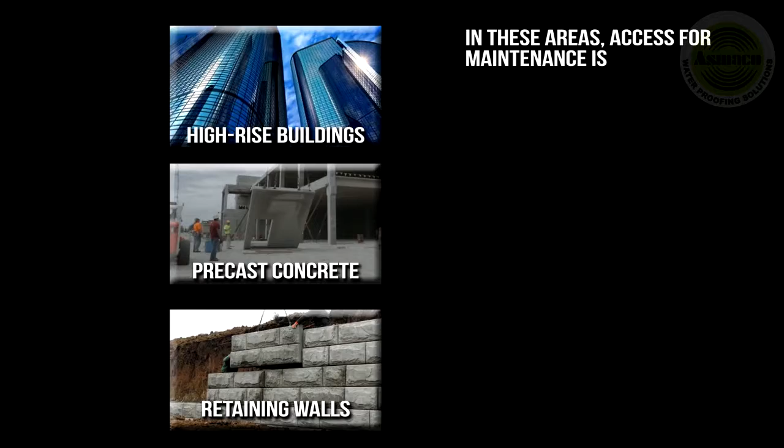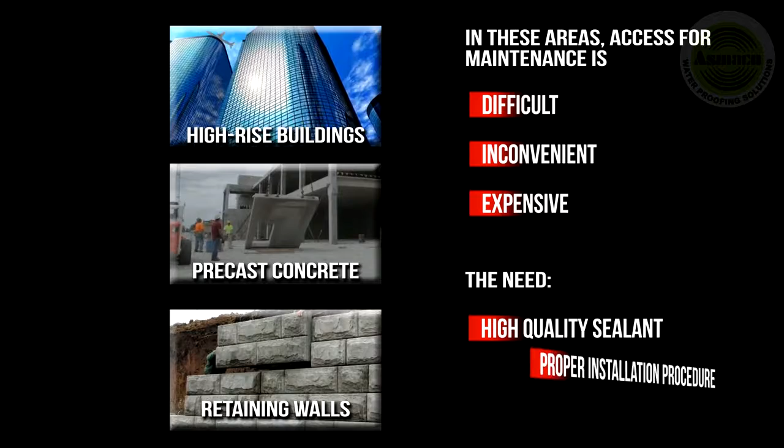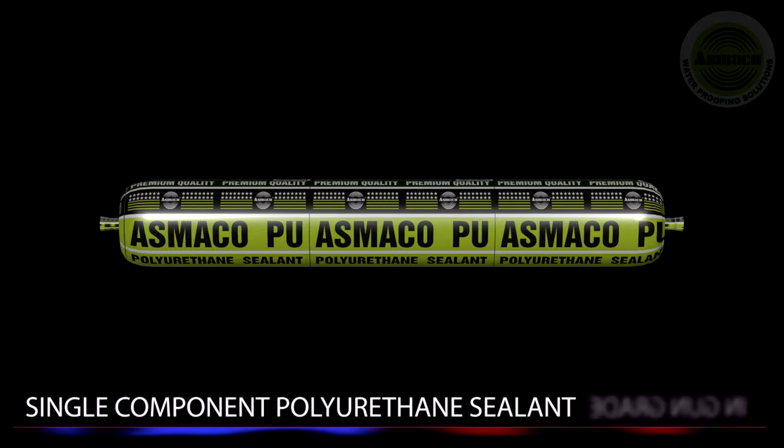In high-rise buildings, precast concrete construction, retaining walls, etc., access for subsequent maintenance is difficult, inconvenient, and expensive. This demands a high-quality weather-resistant sealant and proper installation procedure so that chances of failure are minimal. ASMACO PU90 single-component polyurethane sealant is the most effective answer to all these needs. It is available in gun-grade consistency.

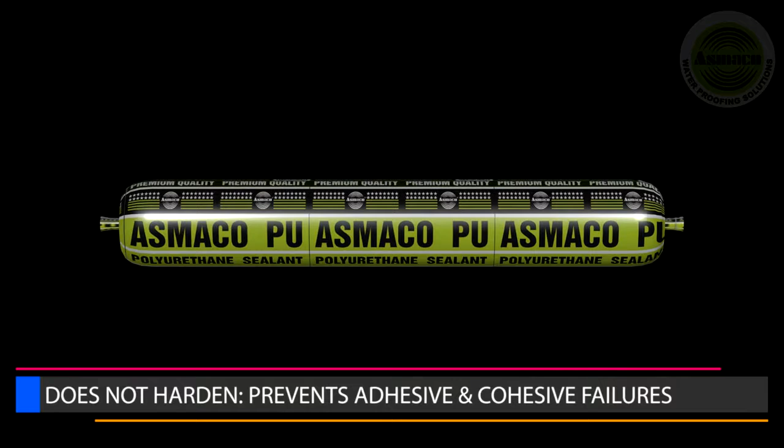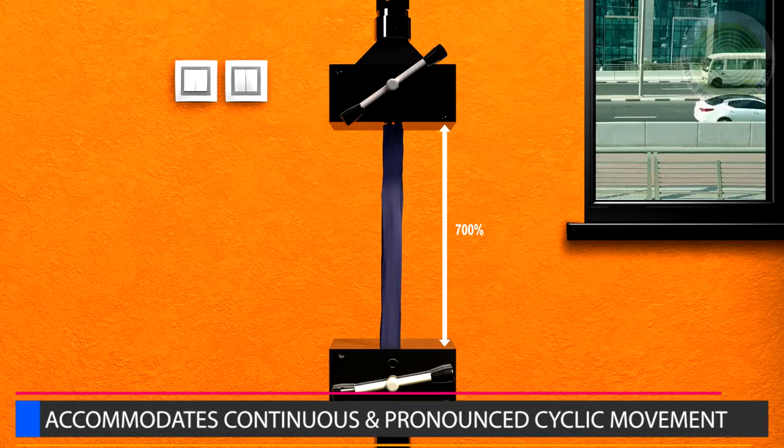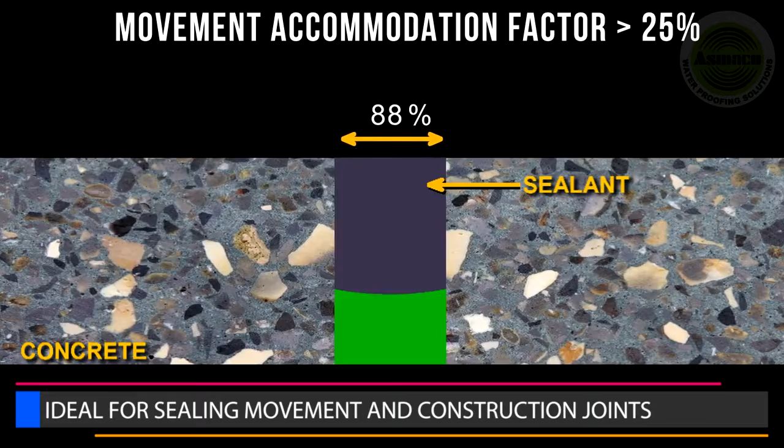Let us see some of its benefits. It does not harden with aging. This prevents adhesive and cohesive failures with time. ASMACO PU90 has an elongation of 700% and accommodates continuous and pronounced cyclic movement. With a movement accommodation factor of over 25%, it is ideal for sealing of movement and construction joints, as well as joints between different construction materials.

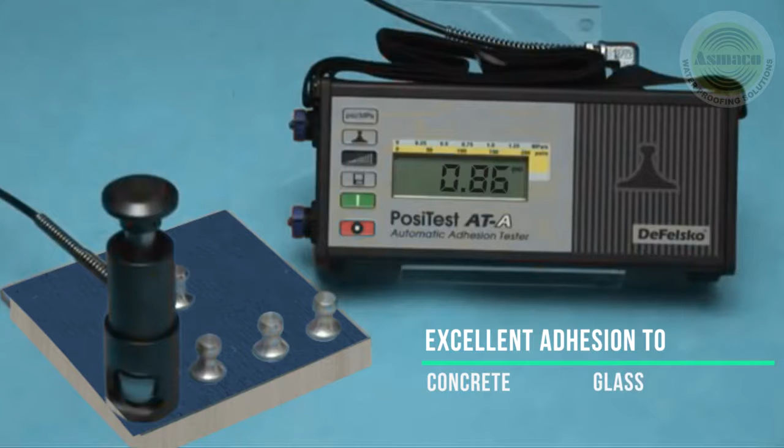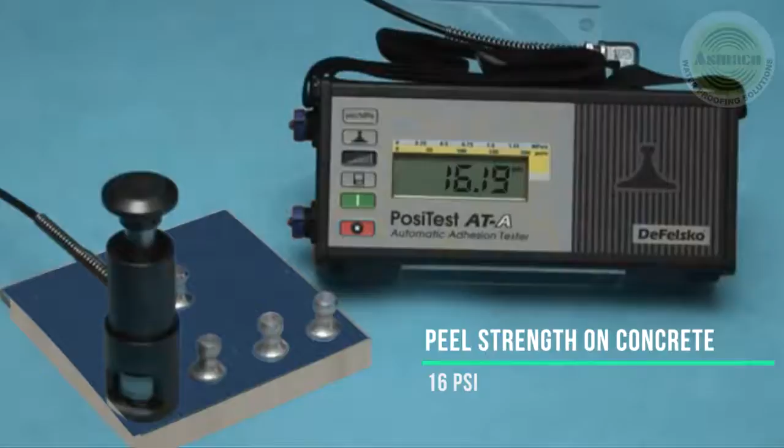It has excellent adhesion to most construction materials, including concrete, glass, aluminium, and stainless steel, with a peel strength on concrete of 16 psi. This makes it ideal for use in curtain wall panels, tilt-up panels, window glazing, and flashings, etc. ASMACO PU90 remains unaffected by UV rays, ozone, and prolonged weathering, making it ideal for outdoor use.

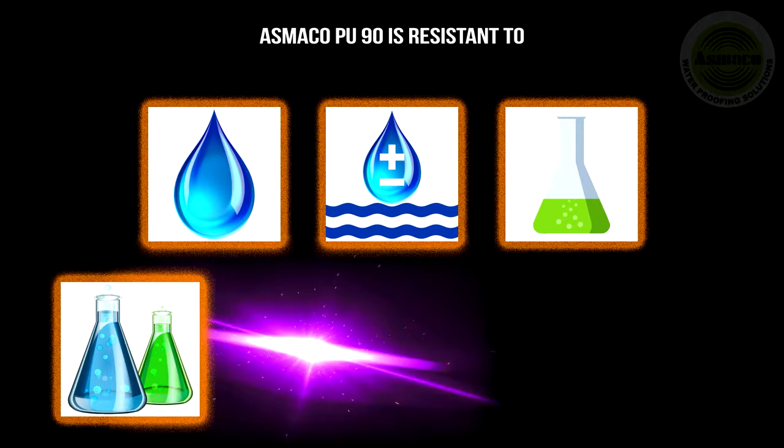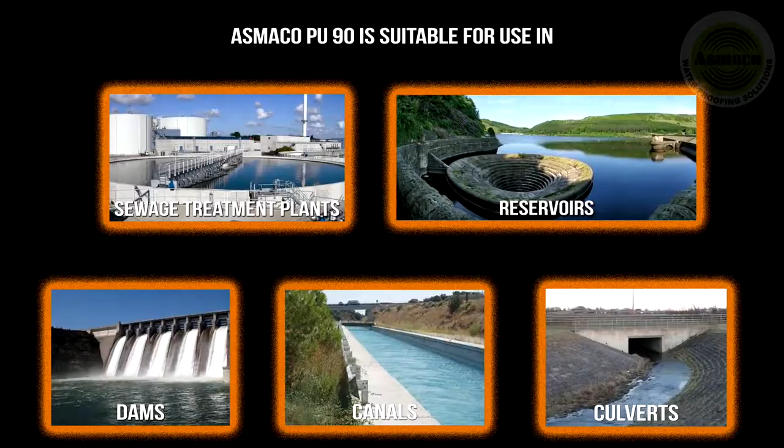It is resistant to water, salt water, most alkalis, mild acids and common chemicals, vegetable oils, lubricating oils, and fuels. Therefore, it is suitable for use in water-retaining structures such as sewage treatment plants, reservoirs, dams, canals, and culverts. ASMACO PU90 is certified safe for potable water use, making it ideal for potable water tanks.

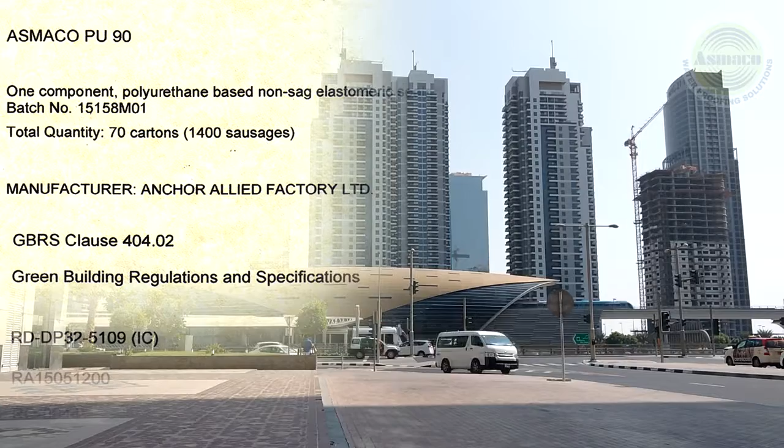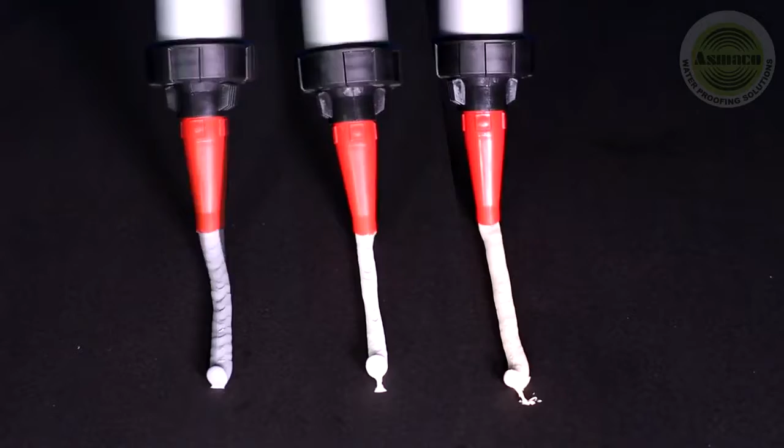It is also certified by Dubai's Central Laboratory as meeting Green Building Regulations and Specifications Clause 404.02. With a wide service temperature range of -40 degrees to +79 degrees Celsius, ASMACO PU90 is ideal for almost all climatic conditions. It is available in grey, white and beige colors. And for any other color of your choice, just specify your color from the RAL shade card.

Therefore, ASMACO PU90 is absolutely the ideal choice where tough technical requirements and aesthetics are both important, such as sealing prefabricated GRC or precast concrete panels, etc., because the sealant completely blends in with the color of the structure. It is also ideal for caulking joints around windows, doors, and skirtings, as well as wall and floor joints. With all these properties, ASMACO PU90 is far superior to all the conventional joint sealing materials like bitumen, mastics, metallic channels, and expansion sheets. ASMACO PU90 is very easy to use.

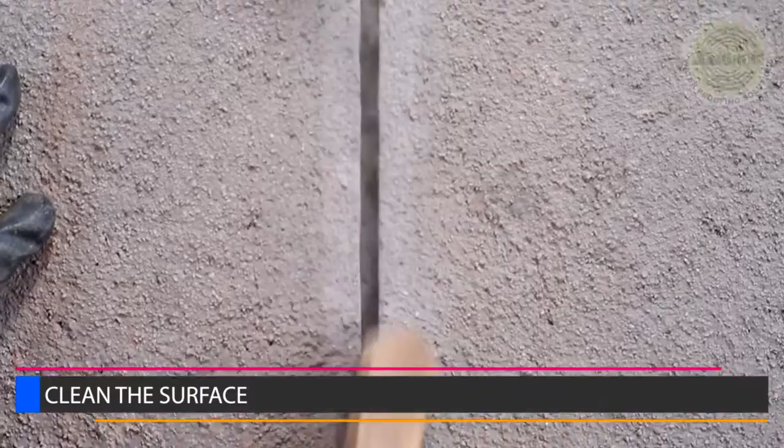Here is a quick look at the tools needed for this job. Also ensure that you wear protective clothing and use safety gear like helmet, eye protection, breathing mask, gloves, and safety shoes during application. Proper surface preparation is of utmost importance. Ensure that the joint surfaces are sound and fully cured. Clean the joint surfaces to remove all dust, laitance, and other contaminants by rigorous wire brushing or grinding if required. Remove the dust.

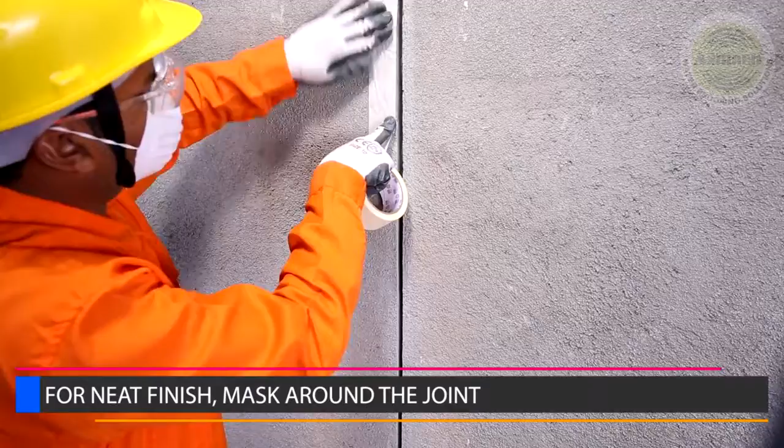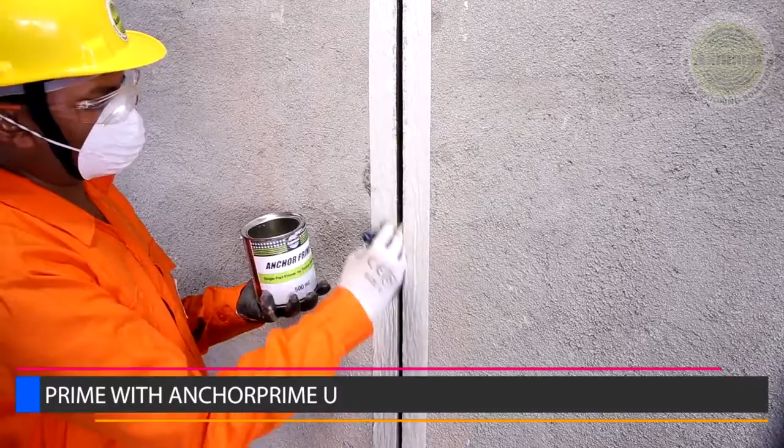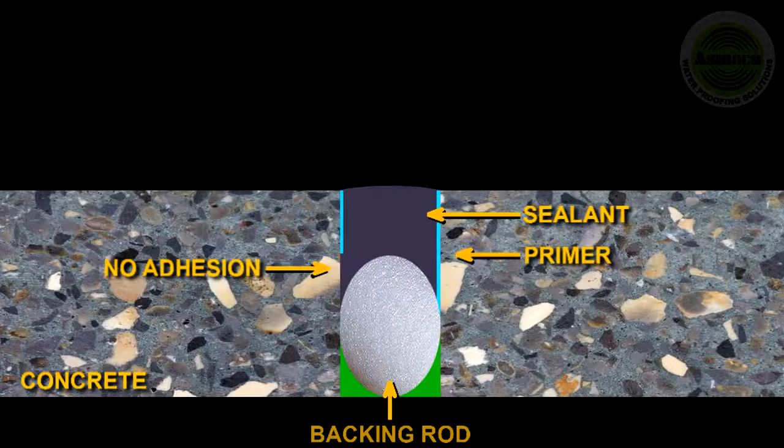If a neat finish is required, mask the surface around the joint using a 2-inch wide masking tape. This will prevent the primer and sealant from spoiling the appearance of the surface. Priming is the next step. Using Anchor Prime U, apply one coat with a clean dry brush. Ensure complete coverage. Proper priming is critical. If the primer is not applied to the sides throughout the depth of the joint, then the sealant may lose adhesion during joint movement and the seal may fail.

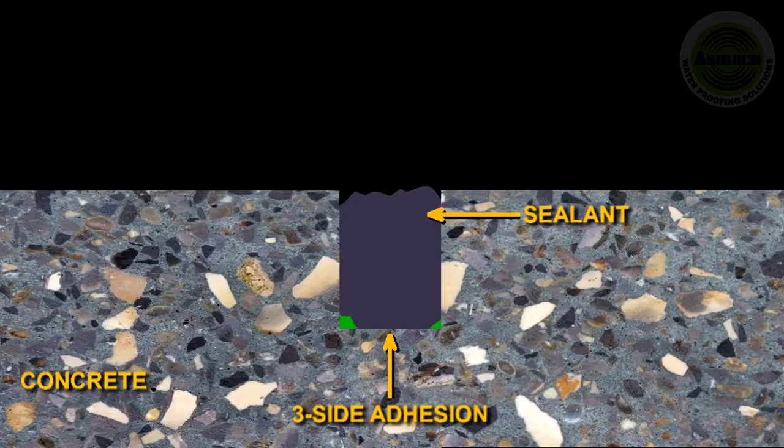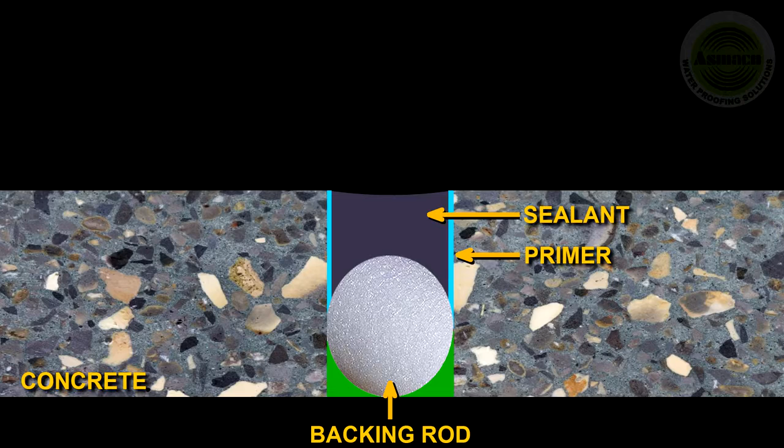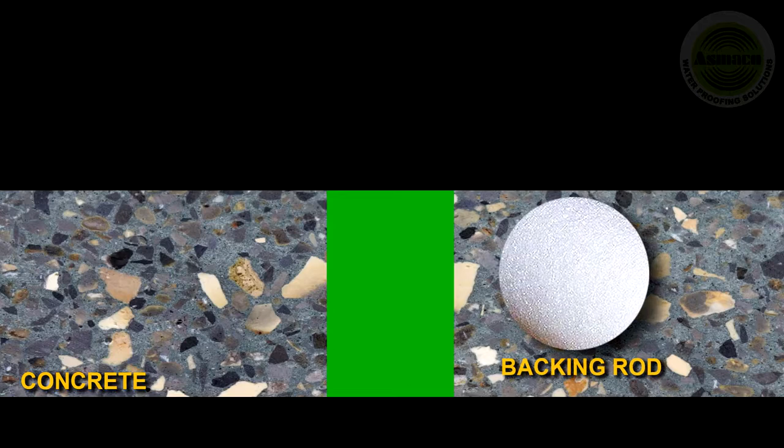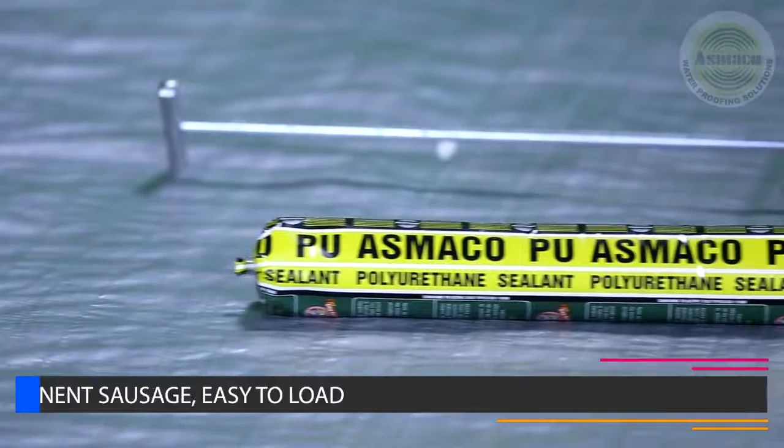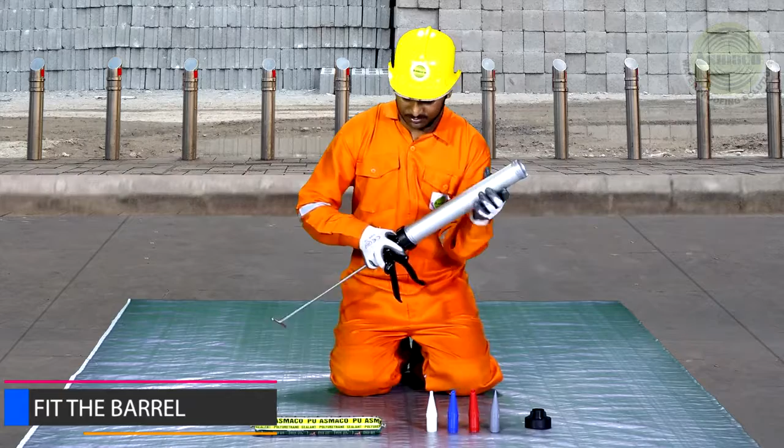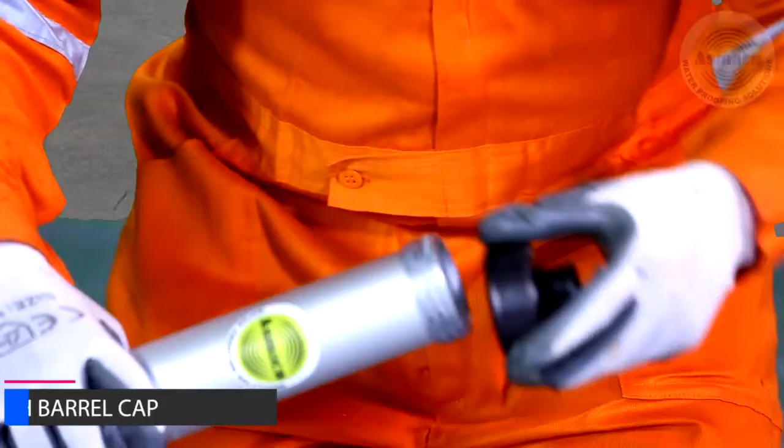ASMACO PU90 comes as a single component sausage, which is extremely easy to load into a bulk gun. Fit the barrel of the sealant gun. Now, cut off the tip of the ASMACO PU90 sausage and load it into the gun. Attach the barrel cap. The ASMACO sealant gun is supplied with a set of PVC nozzles, which are pre-cut to different bead sizes. Attach the desired nozzle to the cap of the gun depending on the width of the joint.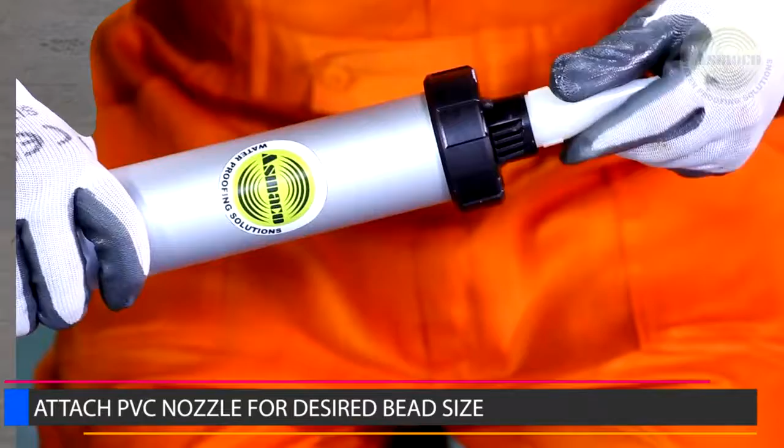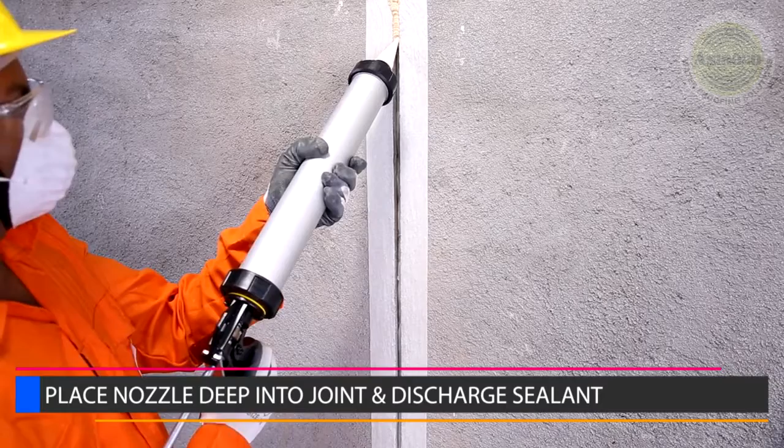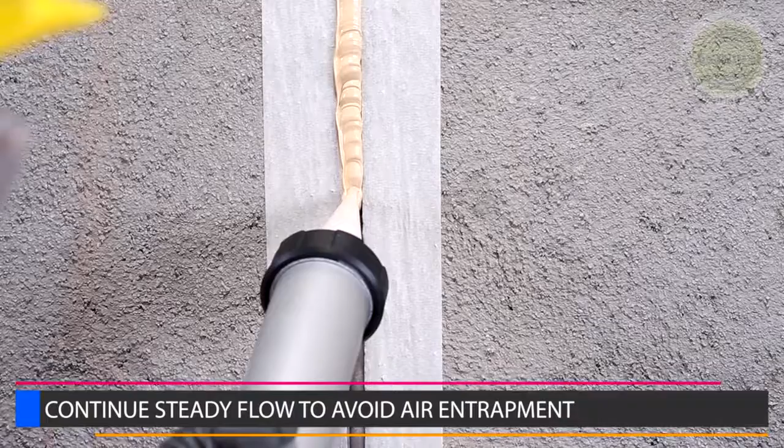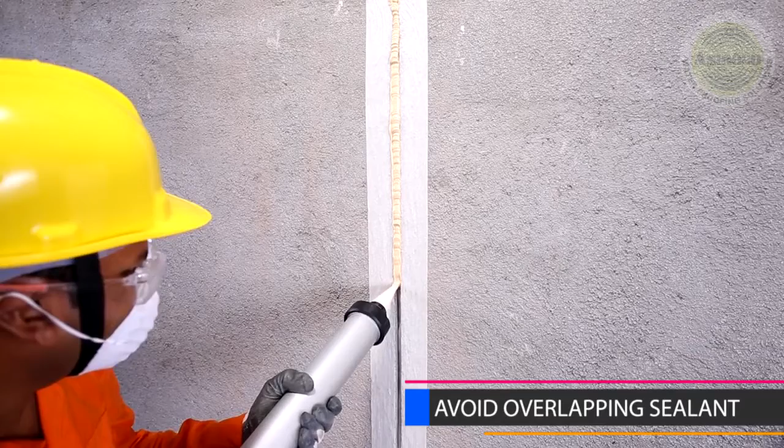Starting from one end, place the nozzle of the gun deep in the joint and press the trigger in the gun to discharge the sealant. Place sufficient sealant to fill the entire joint depth from the inside to the top surface evenly. Keeping the nozzle deep in the sealant, continue a steady flow of sealant to avoid air entrapment. Move the gun along the length of the joint in one direction only. Avoid overlapping the sealant. Once the joint is completely filled, press the sealant firmly against the joint walls using a tooling knife. This ensures 100% contact and adhesion with the surface and also helps in removing any entrapped air.

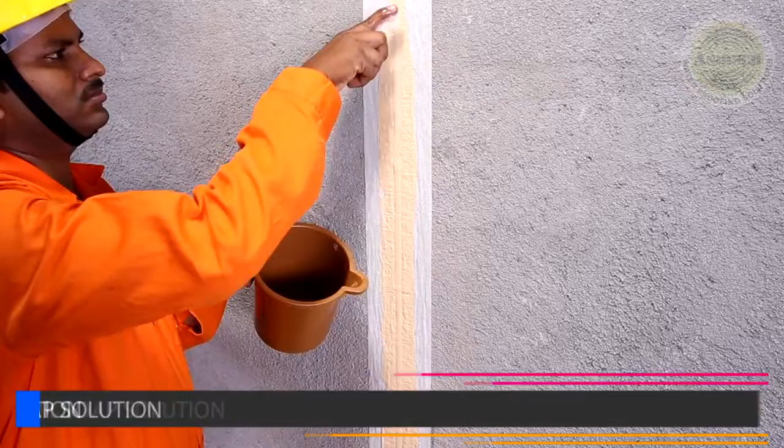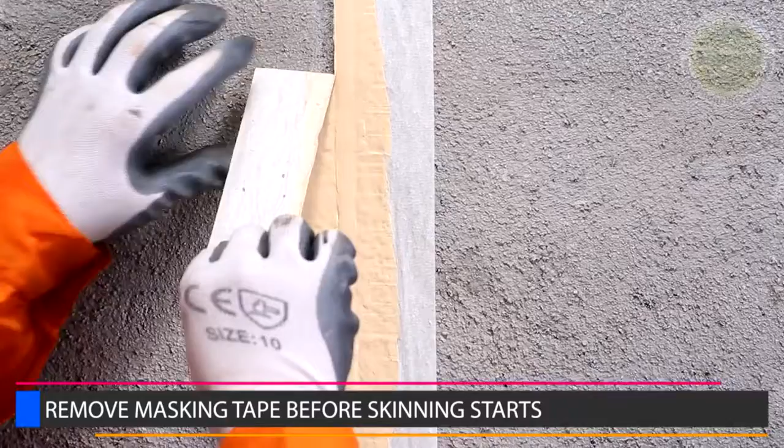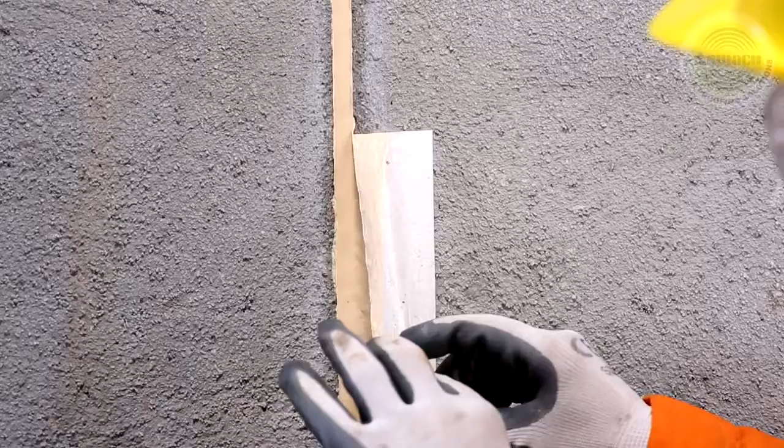If required, finishing can be done by tooling the sealant surface with a finger wetted in a 5% soap solution. Immediately after tooling, the masking tape should be removed before skinning of the sealant starts. If the masking tape is removed without delay, the edges are properly finished. The sealant cures at a rate of 1 mm depth per 24 hours.

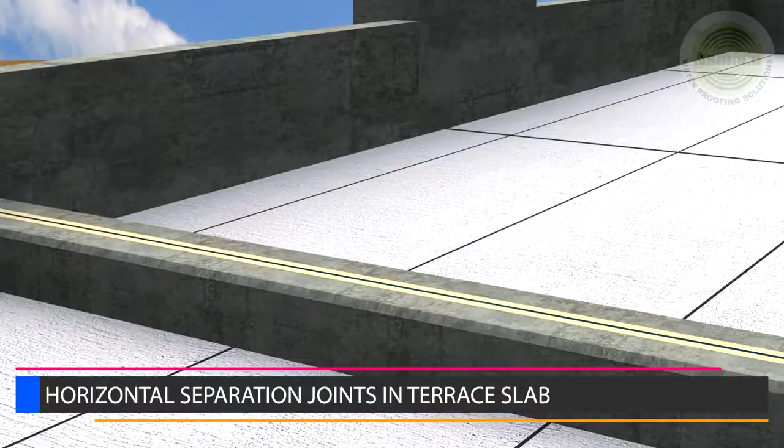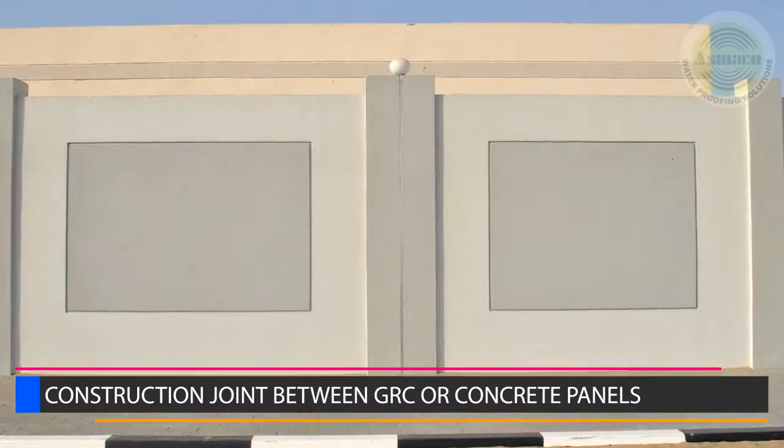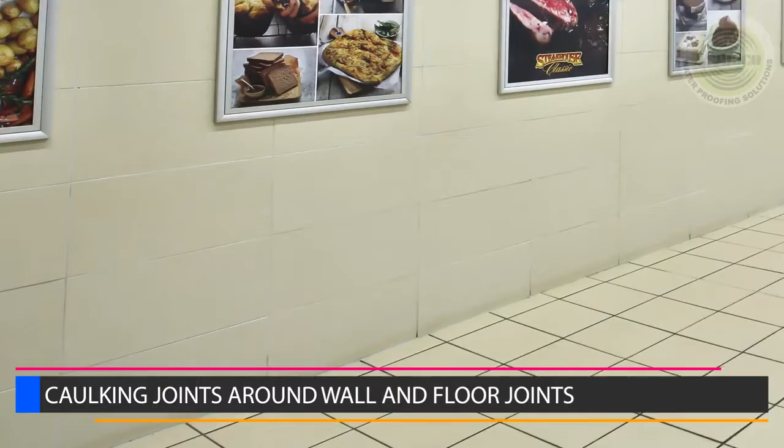Let us see some of the areas where PU90 can be used. ASMACO PU90 can be used to seal the horizontal separation joints in the terrace slab, as well as vertical separation joints. It can be used to seal the construction joints between prefabricated GRC or precast concrete panels, as well as to seal the joints between facades and walls. It is also ideal for caulking joints around windows, doors, and skirtings, as well as wall and floor joints. Other application areas include water retaining structures, retaining walls, potable water tanks, and a whole host of other uses.

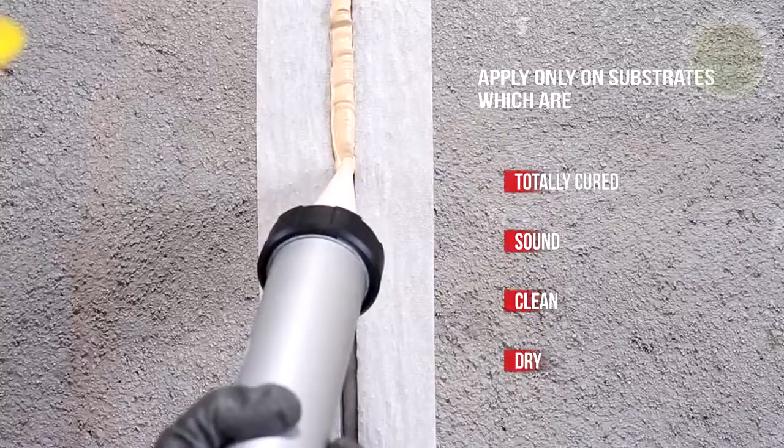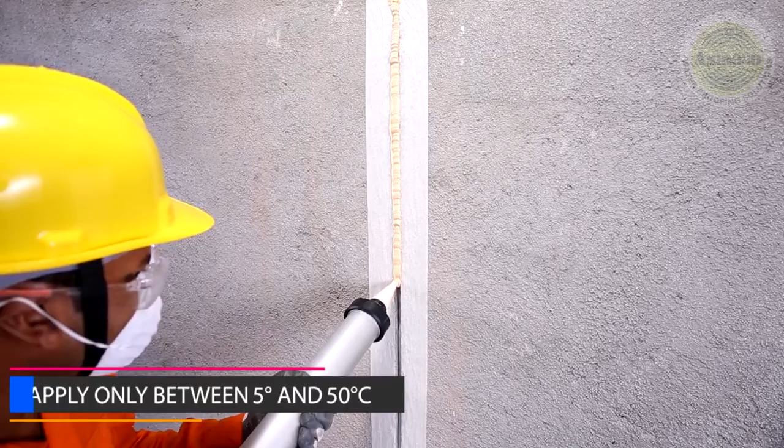Finally, let us see the precautions to be taken when using ASMACO PU90. Ensure that you apply PU90 only on totally cured and sound substrates which are completely clean and dry. A backing rod is essential as adhesion of the sealant must only be on the two opposite joint faces. The application temperature range is between 5 degrees and 50 degrees Celsius. Do not apply outside this temperature range. Most importantly, always wear protective clothing and use safety gear like helmet, eye protection, breathing mask, gloves, and safety shoes during application. Avoid product contact with eyes and skin.